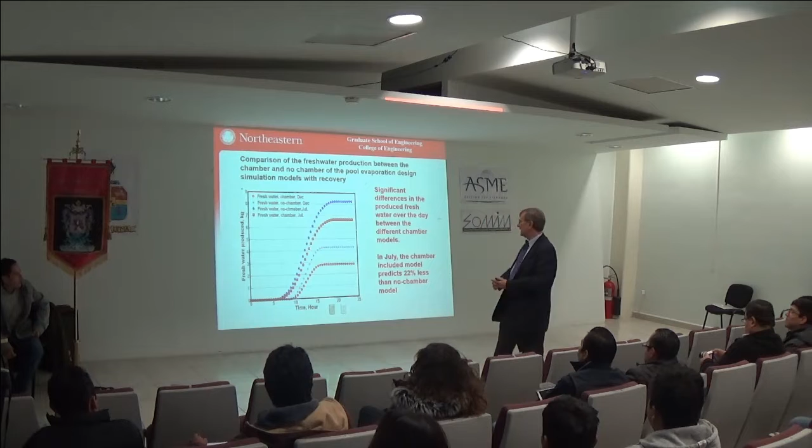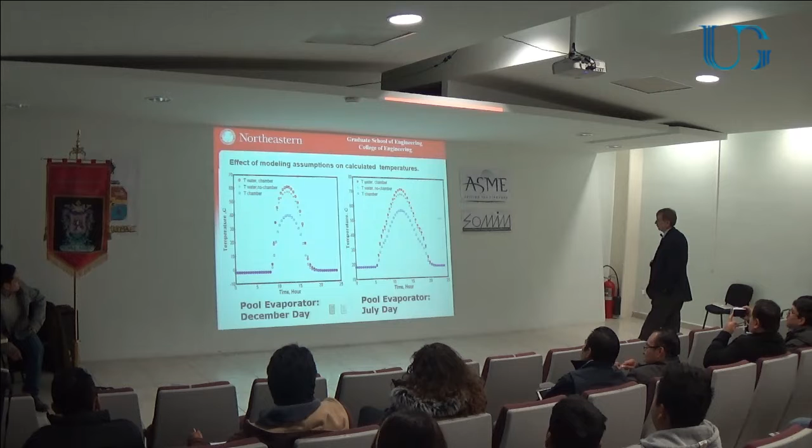Eric was really good in the other classroom. Can we go back a little bit? I want to set the stage a little bit more. I want to go back to the figure. Okay, right here.

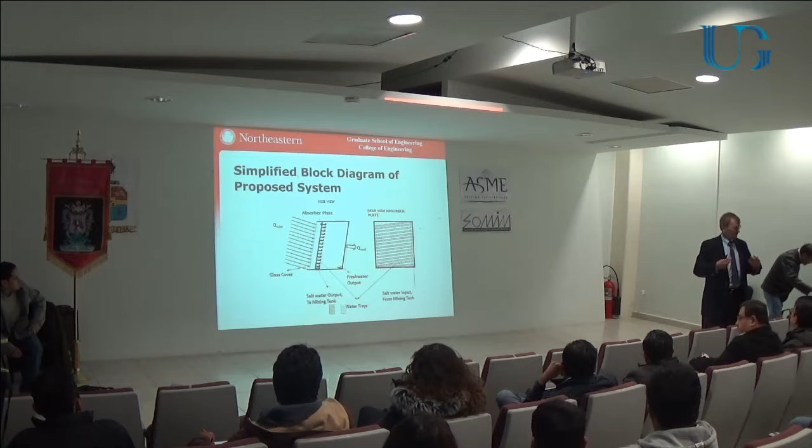What I talked about yesterday was predicting the incident solar radiation, and we talked about the Excel sheet. I talked about energy systems and what it takes to integrate them with economics. We need to worry about technical issues, and we need to worry about policy and getting people to accept them. I also talked about the need for an accurate model.

And the previous speaker, Eduardo, that was near and dear to my heart. Yesterday when I said thermal radiation and heat transfer, the radiative transport equation and radiation in participating media was exactly what I was talking about. So it was a very, very interesting, good talk.

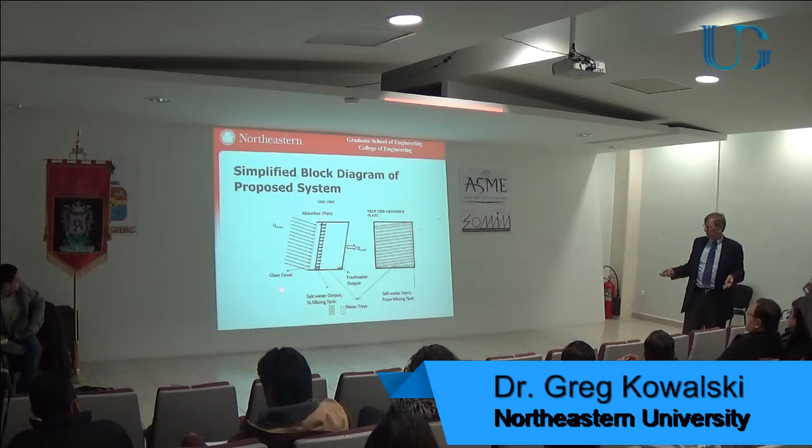But you need accurate models, we need accurate simulation. One of the things that occurred in the literature was in this chamber where we have moist air, we're adding more and more moisture to the air, water, and we want to condense it. Modeling this particular chamber requires both mass balances and psychrometrics, and the question is, do we have to go through all of that? Can we simplify things?

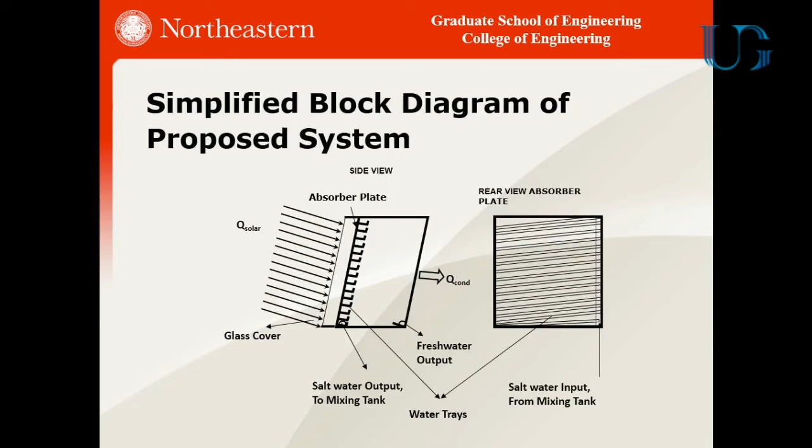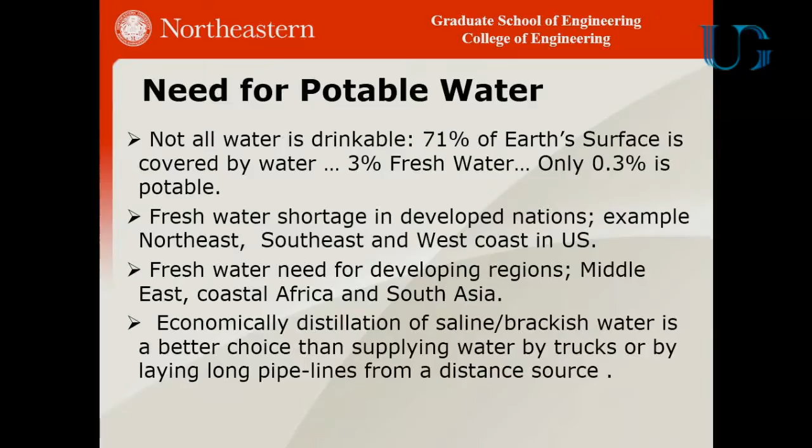Can we go back now? So we went through the models, the radiation, the temperatures, and this was a comparison that I was rushing yesterday. This is comparing the model with the detailed chamber model, where it says no chamber, that's the 2 degrees C assumed temperature difference model.

What you can see is, if I look at the July data, I'm getting a significant difference in the daily freshwater production between modeling it with all the physics and making a simplifying assumption. It's this type of assumption that can get us into a lot of trouble when we start doing simulations, because we're trying to develop a product that is going to be different or competing with reverse osmosis. If I made the no chamber model, my model predicts 22% higher output. And guess what? That might say, hey, this was better than reverse osmosis, when in fact it isn't. So you need to be aware of the accuracy of the models.

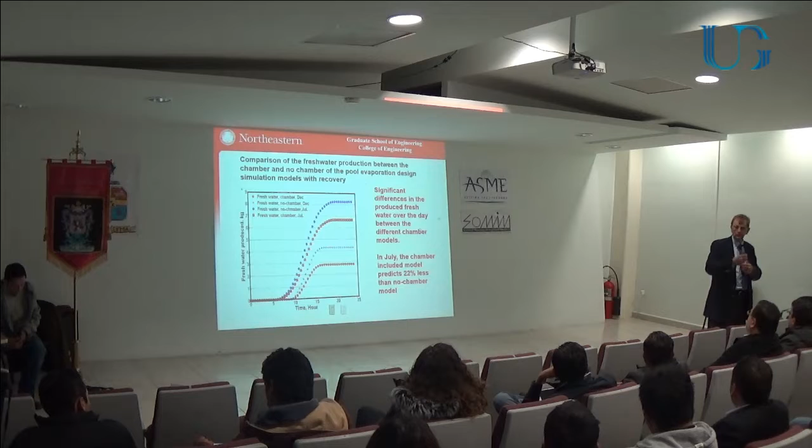I feel so disrespectful, I keep referring to the previous speaker by his first name, Eduardo. Professor Ramos. He deserves the respect.

When he was looking at his simplified models and looking at trends, he gave a very good explanation of the value. It gives you some basis to move forward. When we come to energy systems and comparing alternatives, you have to be aware of those assumptions and what role they play. Are they negligible? In this case, we need to include the model.

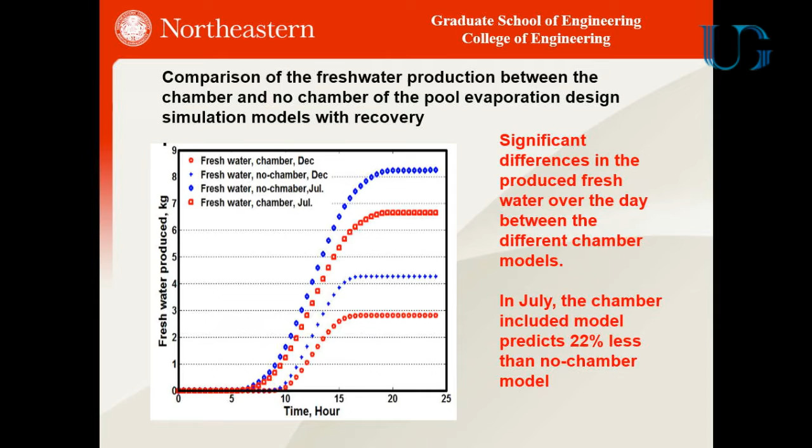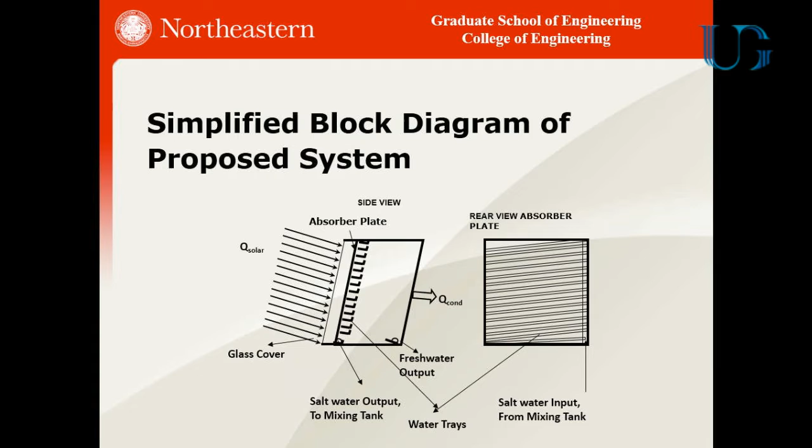May we go on? So I forgot this was here. So we're looking at this simplified tray model. Let's go to the next slide. What we did was include the chamber model, bring in the Boston solar radiation data, and we looked at comparing the pool evaporator, that very simple design, with the tray design.

Is the tray design better? That's the question. If you look at these results, the tray design are in the blue, the pool evaporator, that very simple design, is in the red. You can see that there's a significant difference, especially in the summer months, between the two designs. In fact, we're almost a factor of 2 better with the tray design in the summer. So this was very encouraging.

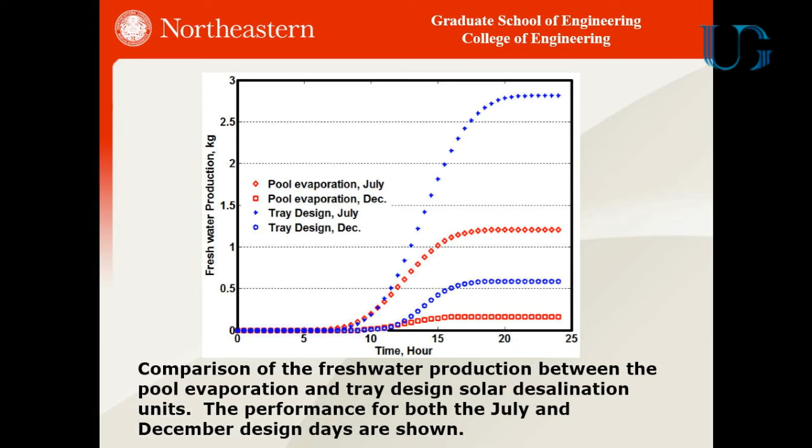Now, we also have to realize, comparing the two designs, I now have a very complicated manufacturing process to make those trays and attach them to the absorber plate. But I see a significant improvement. But how good is good? Can I have the next slide?

Okay, and how does this compare to the reverse osmosis? You asked me at the end of the presentation yesterday, was it you or you, what are we comparing this mini project to? Well, I'm going to answer that question now.

On this table, I'm comparing the reverse osmosis output to the tray in July and December. If I look at the reverse osmosis, I gave you this number, it produces 66 cubic meters per hour. But we want to know how much it's going to produce per day. Again, the reverse osmosis, single design point, we just multiply by 24 hours, run it constantly, and these systems are designed to run continuously, except for scheduled maintenance. It is going to produce 1,584 cubic meters per day.

Now, the solar collector trays that I'm describing are only 1 square meter. The idea is I build modules, individuals, and then put them all in parallel, put them on my floating barge. So the trays, putting in terms of the same volumetric flow, are only putting out 2.9 thousandths of a meter cubed per day.

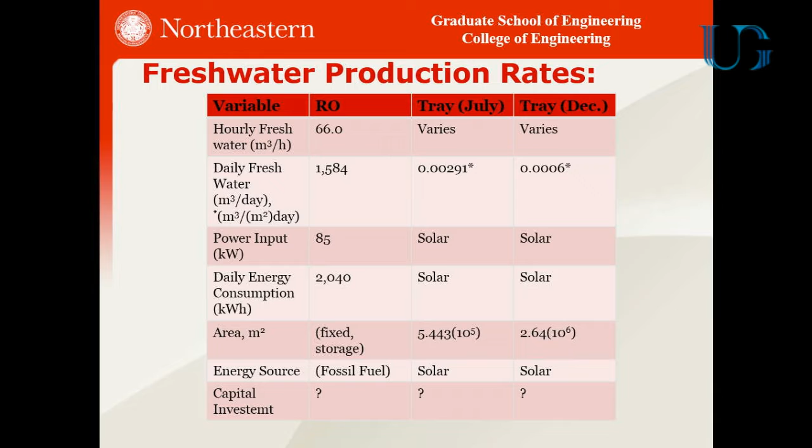The modification to the mini project, the addition: what I want you to think of is you install your solar collector fields, you collect energy and have a perfect storage medium, and we'll use that energy to supply this power for the next day. Again, this is why renewables, variable sources, could really complicate our lives. Because in this case, it isn't a matter of plugging into the plug. I have to collect energy that varies over time.

Now, in the solar case, I have no other power input. The area I'm assuming, for pumps, stored water, is basically going to be the same, and I didn't put that down. For the reverse osmosis, let's assume fossil fuel. And I don't have a capital investment, I don't have the economics for this, but let me just finish the chart.

The area that I would require in July for my solar trays, I just remember the ballpark number, I don't want to give it exact. It is 5.4 times 10 to the fifth square meters. Anyone have an idea how big that is? No? I don't either, but I'm getting kind of lost in 10 to the fifth.

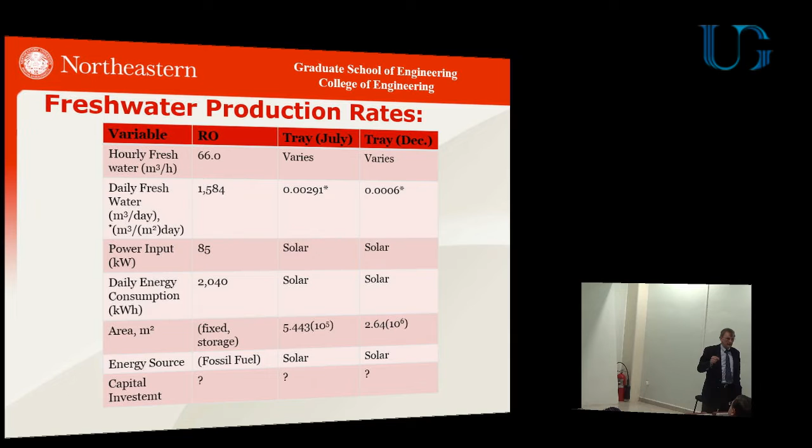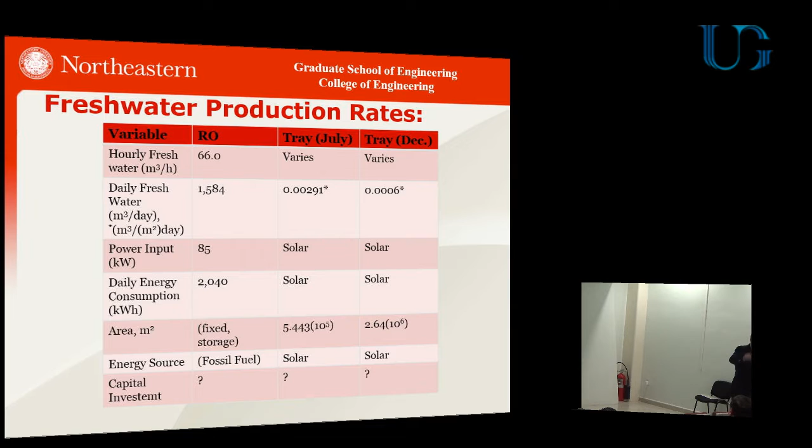No, this is for the collectors and land, installed. That's quite an investment. And even if it lasted 20 years, how large is Salamanca? How many people live here? What's the population? Is it 150,000 residents who now would have this amount of fresh water, probably not enough. But start to divide 150 billion by 20 by 150,000, and your water costs are fairly significant.

Not sure what the reverse osmosis plant will cost. But this is one of the things that you need to think about with renewables, and I fully support renewables. I don't want to give you the idea that I'm trying to discourage renewables, but as engineers that want to solve problems, we have to come up with solutions that people will implement.

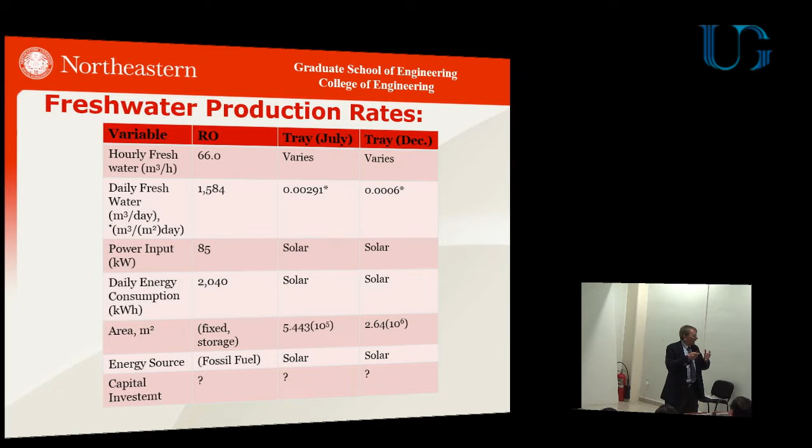So great, we have all this electricity, nothing to use it with. So the electric utility companies actually became appliance dealers. They would sell electric hot water heaters, irons, electric stoves, the cooking utensil of the future. I don't think they quite got to refrigerators. But what happened is, in order to sell electricity, they literally gave away electric hot water heaters.

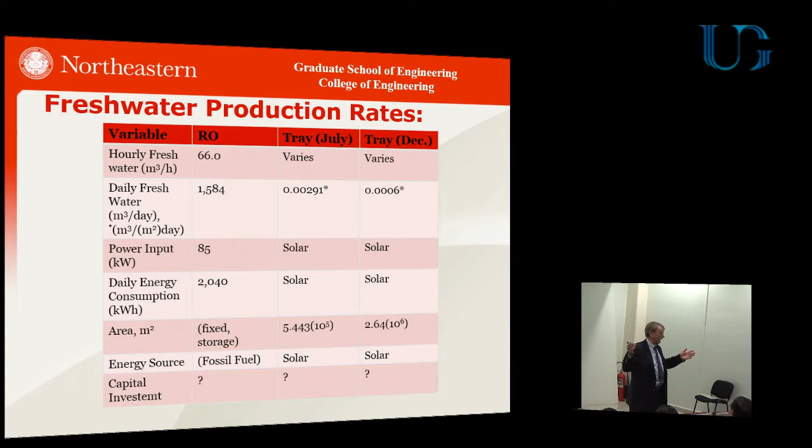So they electrified your house, gave you a hot water heater, and suddenly you had a rusting tank in your attic that just became an eyesore. And the use of solar for hot water heating totally went out of acceptance. Now it was a hot water heater. Today it's a natural gas fired hot water heater. Things change. That customer psychology, people's perceptions.

So it's not just about money. You have that societal impact.

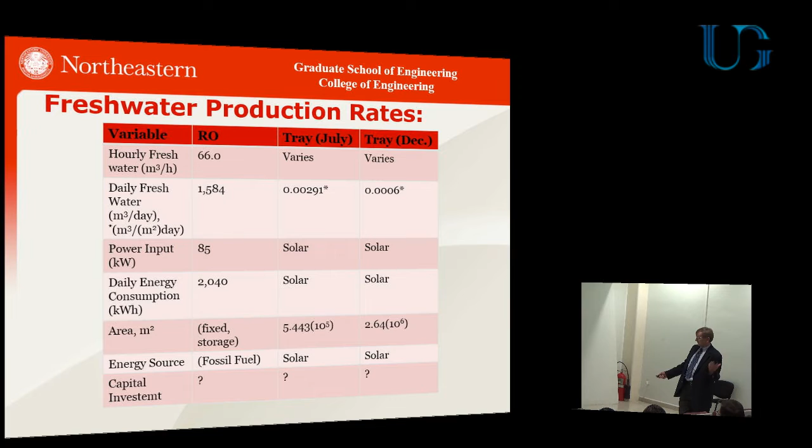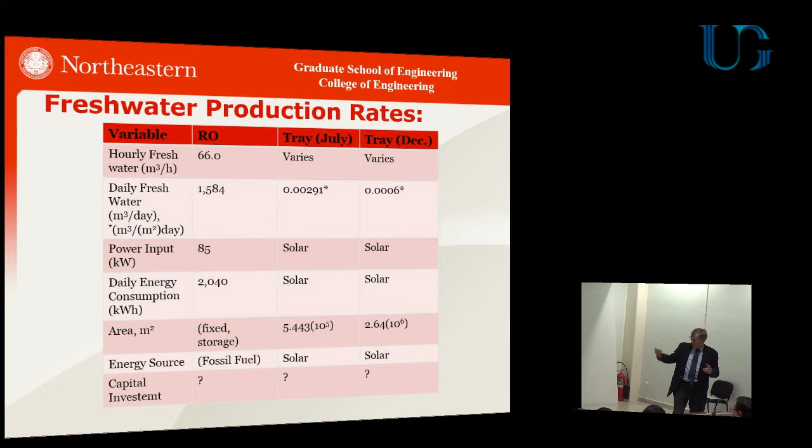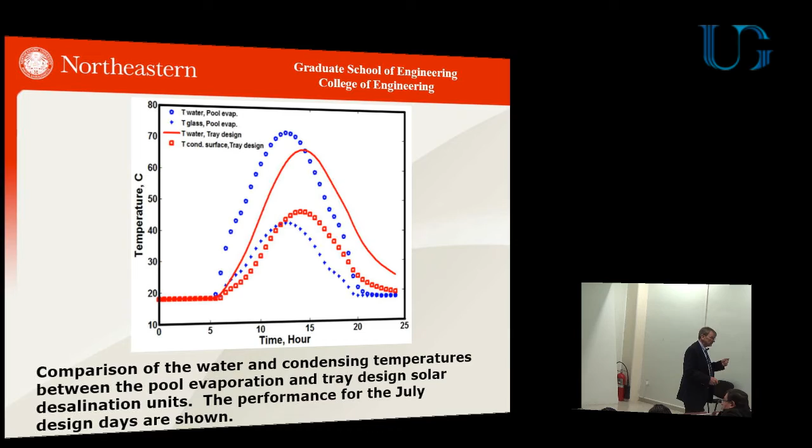And when I look at these results and I'm trying to spin them in some way that I don't feel embarrassed up here, a multi-billion-dollar project that's going to take up 240 soccer fields, is this the best that we can do? May I have the next slide? Oh, I'm sorry, leave it there. Is this the best that we can do? Because if it isn't, how good can we make this? And can it become competitive?

Now, one of the other results, just to show you that you can mine these simulations, this was comparing the water in the pool and the glass. These are the two major temperatures. One affects condensation, one affects the evaporation rate. And you can see how, with the tray design, there's a built-in

storage effect that we weren't anticipating. Yes, we produce lower temperatures in the water, but we produce more fresh water. And if you notice, the red lines continue producing fresh water a little bit longer than the blue lines. The reason for that is we have a more massive absorber plate that displaces the peak temperature slightly. This indicates that maybe we should be looking at some of the mass of these units, and maybe we can take advantage of this.

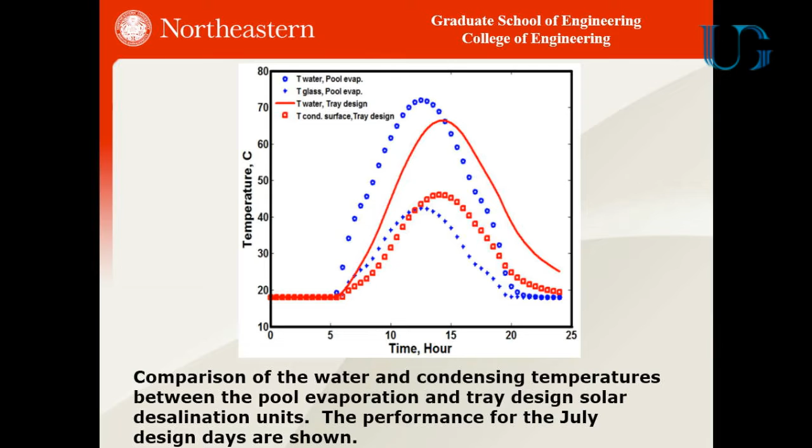And again, the idea is, can we do better? And this is where the second law comes in. This sets our operating limits. And you've heard some of this before. It identifies where the losses and irreversibilities are happening, a roadmap to making us better.

Is the source matched to the load? And I mentioned yesterday, all of these are tied to sustainability. The two parameters that we want to look at are exergy destruction or entropy production. We also want to look at a second law efficiency. That's what both Professor Lienhard was quoting and what I have been quoting in my presentations, our second law efficiencies.

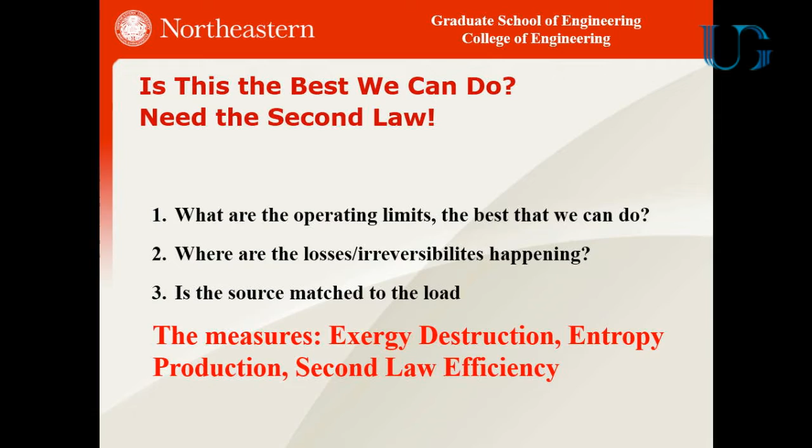The second law is... how many of you have had thermodynamics and the second law? Okay, I am going to pick on one of you. Are you very comfortable with the second law? Are you as comfortable with it as you are with the first law? If I asked you to calculate the exergy destruction that I'm producing as I lecture to you, would you be able to do that?

Okay, you're better than my students. Usually we don't have the intuitive feel of the second law. And we're told all these one-line statements. The most popular one is: the second law, you always lose, and you never break even. Right? And the little sidebar, you have to play the game. You can't opt out. Well, that's true, there's nothing wrong with that statement.

And then we get a little more formal: you cannot operate a power-producing device with a single heat reservoir. You need a heat rejection, and I'll come back to that. But the second law has a lot of subtleties that don't exist in the first law, and we almost always revert to the first law for design. So I thought I'd take a little sidetrack and see how many people have not had thermodynamics.

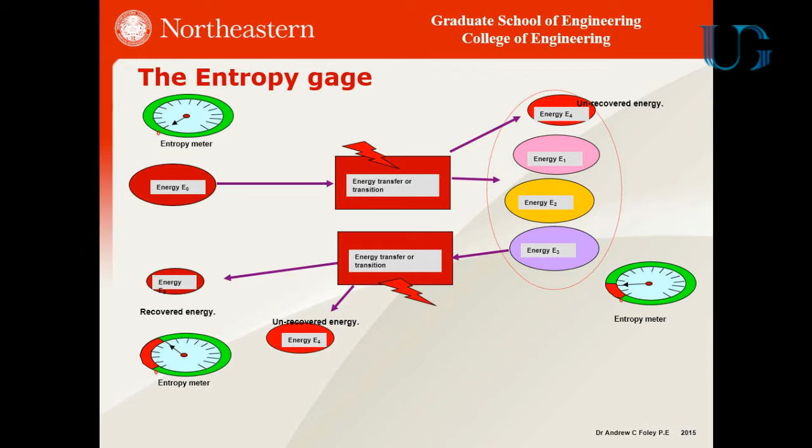And by the way, I forgot on that slide, Dr. Andrew Foley is a professor at the U.S. Coast Guard Academy, and he probably does this much better than I.

But what I want you to think about is a fluid flow that goes through a system and encounters a restriction that we call an orifice plate. And this restriction alters the flow, causes a pressure drop, and the energy in the flow takes on a different form as it moves through.

Now, when I talk about energy, I'm talking about internal energy, flow energy, potential energy, and kinetic energy.

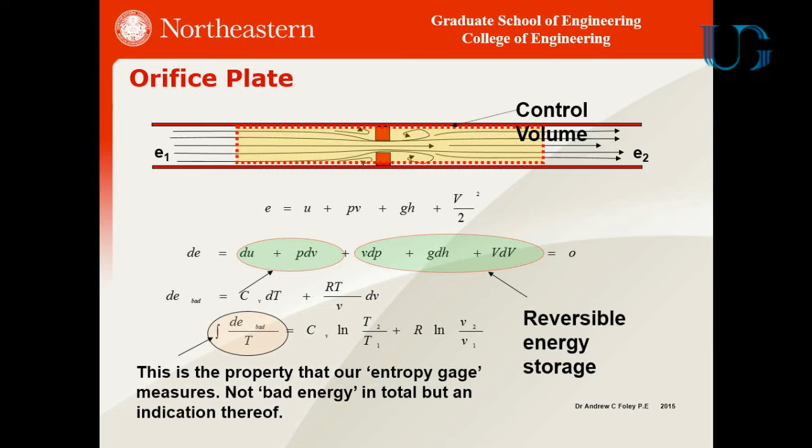And when you think about these energy changes, potential energy is reversible. If I have something at a high potential energy, lower it, I can extract energy from it. If I move it back, it takes the same energy to bring it back up.

The same with kinetic energy. These are reversible. I can store them. I can have a rotating flywheel that stores kinetic energy. I can pump water up a mountain into a reservoir to save potential energy.

This term VdP, think of it as a pressure spring. You have an incompressible material, specific volume isn't going to compress. When you decrease a volume, you increase the pressure. If you release it, you're going to recover that energy. It's the pressure times the change in specific volume or density.

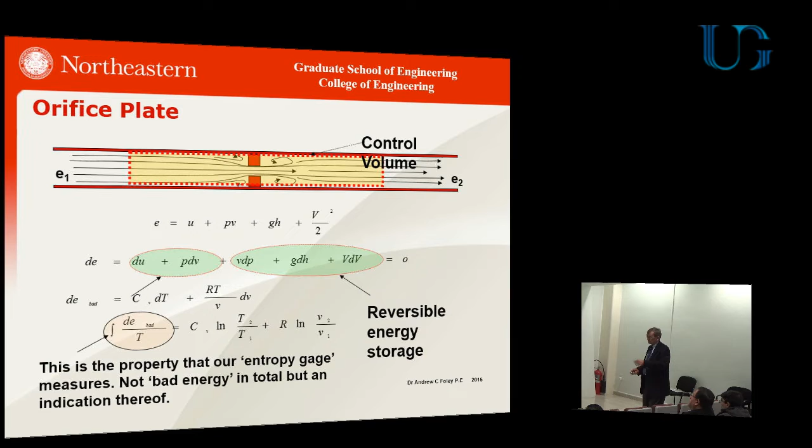May I have the next slide? Also, by Dr. Foley.

If I start taking in entropy accounting, when I have the first law, I have my system of interest—this room, all of us. The energy in this room is changing as a function of time. I hope I'm not increasing the decrease in energy, okay.

But it does that by interchanging with the surroundings. And when you do an energy balance, the rate of change of energy in the system must exactly equal the rate of change of the energy in the surroundings. Energy is conserved. We know that.

But let's go to entropy. If I look at the entropy change in my system with respect to time, and keep in mind that some of this entropy stops being recoverable.

My system has to interact with the surroundings. That is an important statement. The system must interact with the surroundings. That means there's a rate of change of entropy in the surroundings.

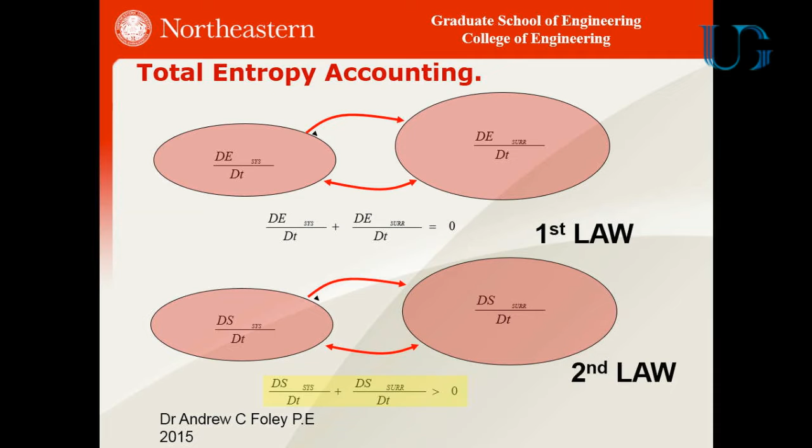Can I have the next slide? Everyone take a really deep breath. If you have any caffeine products, please take them.

Here's my gauge. Entropy is an important key measure. But what we also have to do, or what is a valuable tool, is something we call exergy. It's related to entropy. Exergy is the maximum possible rate of useful energy that we can get from any state or any material at a given state. So if I bring in a very large tank of hot water, it has a certain amount of useful energy that I could extract from it.

How much useful work could I get from that hot water? Or that heat source? Or the sun? That's what exergy provides. Let's again look at E as representing the enthalpy, includes the flow work, potential, and kinetic energy. If I take any device, what I'm going to do is look at the entering energy, my hot water. In this device, I'm going to convert it to work out - a flow of energy out and a heat flow out.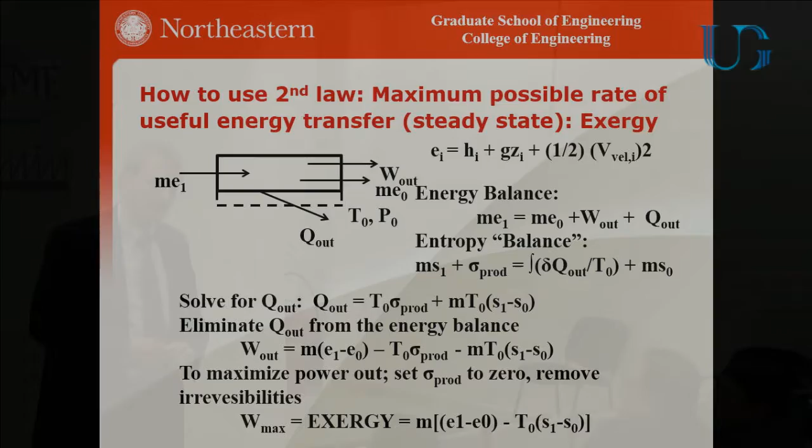If I come and tell you that in the class you're going to go to this afternoon, you're going to have an exam, don't look like 'what do you know that I don't' - I'm making it up. What if I tell you that the grade on your exam will be less than 100? Have I given you any useful information? No - everybody gets less than 100. If I tell you, I don't know you, so I have no idea. If I tell you that your grade will equal 85, have I given you useful information? Yes. Your grade is 25 - the average was 20, by the way.

When I state equalities, I have something useful. Inequalities, it doesn't work. So what we do is introduce entropy production - it's what makes this an equality. Entropy flows with the heat flow divided by T. Who's the gentleman that said he felt comfortable with the second law? I don't think we necessarily gave you this integral without saying it was at a constant temperature. But in most processes, this temperature varies - that introduces another complexity. And then we have the entropy flow out.

In a perfect world, entropy production would be zero. I would produce no additional entropy. That's the ideal limit. I hit one of my major bullets. We have a limit.

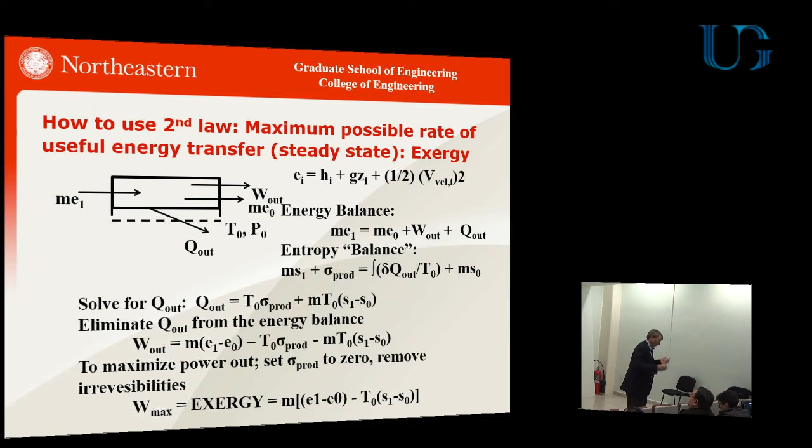We also have some tools for looking at different exergy flows. This large box here is my solar collector. I have exergy that flows in with the water.

Oh, wait a minute. The wait a minute was planned, okay? This wasn't just, oh my God, what am I going to say? I want your attention.

When I did the first law analysis, I just said let's treat seawater as a single material. It had a certain value of the latent heat, and it produces an accurate model. But when I come to the second law, an exergy analysis, I have to take into account how much useful energy I have to expend to separate salt from water.

That means I can't avoid treating it at the exergy level. For the second law, I need to treat seawater as a mixture of water and salt. And depending on the type of salt, as you saw in yesterday's lecture by Professor Lienhard, this is going to bring in all types of chemical potentials and Gibbs functions that I need to include in these calculations.

Now, just hit enter. The red line is incorrect, but it's a point I want to drive home. Many people would draw the exergy system with this red line, and they would take the exergy that flowed out with the brine and the fresh water and just say, well, I'm including it correctly in the system. The problem is, if you don't use this exergy for anything, it should be an exergy destroyed term. I'll say more about that on the next slide.

How you set up your system becomes important. So if I look at my overall system, including a transient term, in order to balance the exergy flow equation, I introduce a term: exergy destruction. It's related to entropy production, but it equals the difference in the exergy in minus the exergy out. I write this for the entire system. I then need to look at the exergy flow with the heat loss, which is simply related to the Carnot cycles.

But something I said before—how much time do I have? Half an hour? Okay, I can be slow. I said 2, okay, I'll do 2. 10? Okay, going down rapidly.

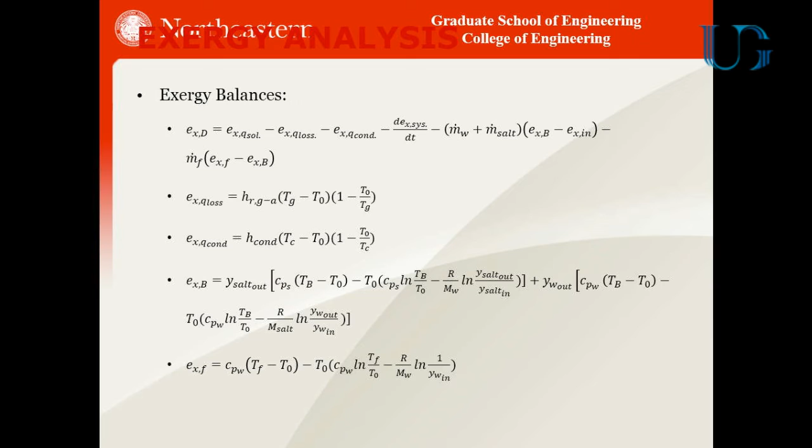The second law efficiency. Can you go back two slides? One more. Okay, the red line is the product system. This is incorrect because we're neglecting exergy that's flowing out of the system and what happens in the surrounding. The complete system is the gray.

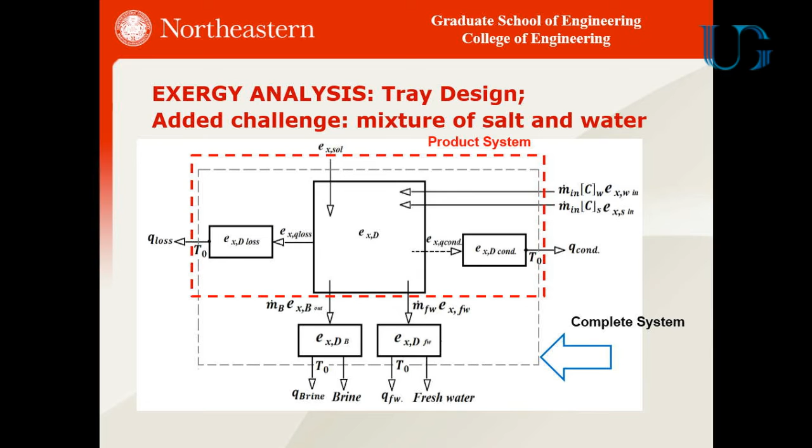Please go back to the table. The second law efficiency on the product approach is 6.65%. This is better than the reverse osmosis. It's incorrect, but it's better.

The pool design performs much lower, but it's still in the reverse osmosis range. Well, we wanted to be correct. When we looked at the actual second law efficiency for the complete system, the second law efficiency drops down to

0.63%, under 1%. That's not very good. Similar drop for the pool. The tray definitely is better performing than the pool, but we already know that, and one of the reasons is because it has a larger evaporator area per incident area.

But this difference between the product and the complete system is telling us one important thing. I have a few minutes, so I can play the audience. What is this telling us?

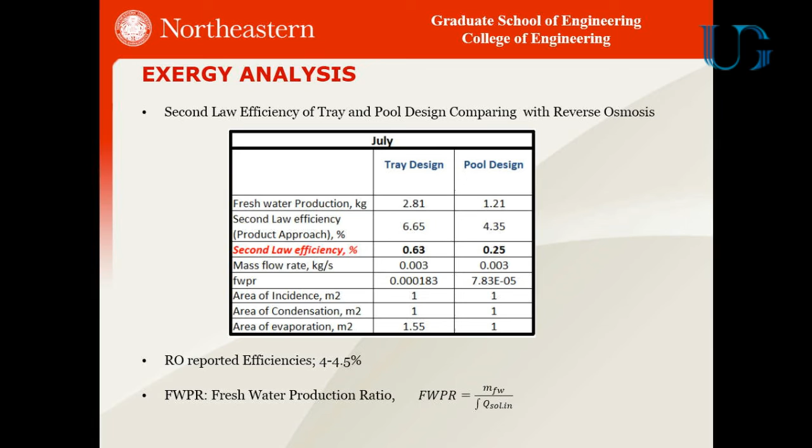Remember, the second law efficiency is I add up all the exergy destroyed in my tray collector, the exergy that is leaving, that I don't use, and the exergy destroyed in the heat transfer. Why this big difference between that product approach in the second law efficiency and the complete approach?

Can you go back to the system sketch? That's exactly correct. When I look at each of these exergy destruction terms, this exergy destroyed in the brine flow,

this hot flow out, is one of the largest exergy destruction terms in the system. And that's why we see that difference. This is telling me how I should improve it.

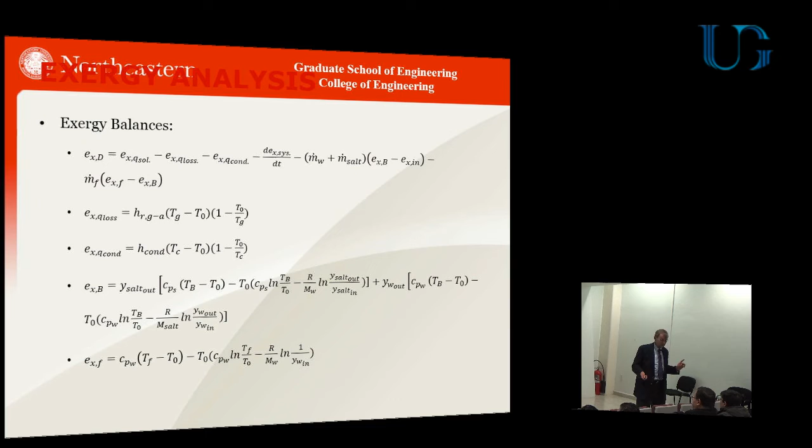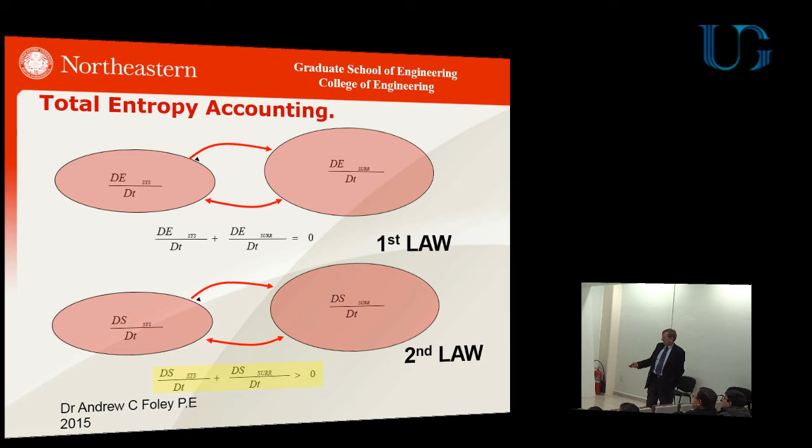We had to skip one, go back one, move forward, I'm missing a slide, go down. These two are out of order. I apologize. What we did was to put a heat exchanger, very simple heat exchanger, that only operated off the brine because that was the major flow. We took the hot brine, put it through the heat exchanger, and then discharged it.

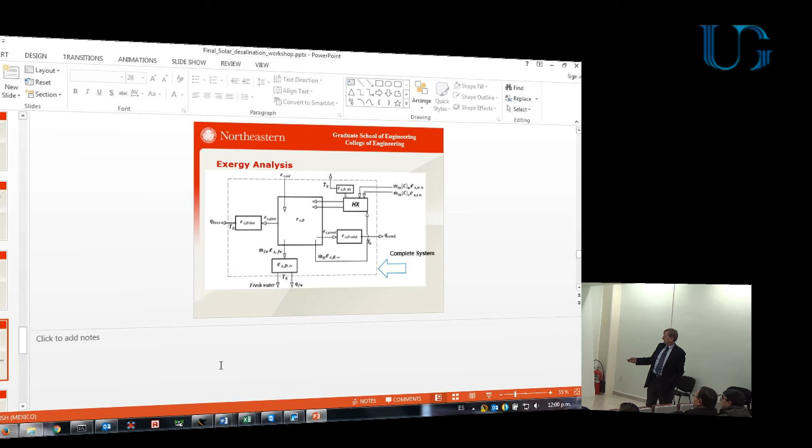Going out here, we preheated the incoming seawater, and we've only looked at the complete system. What the earlier analysis did was to say, I was throwing away a lot of exergy here.

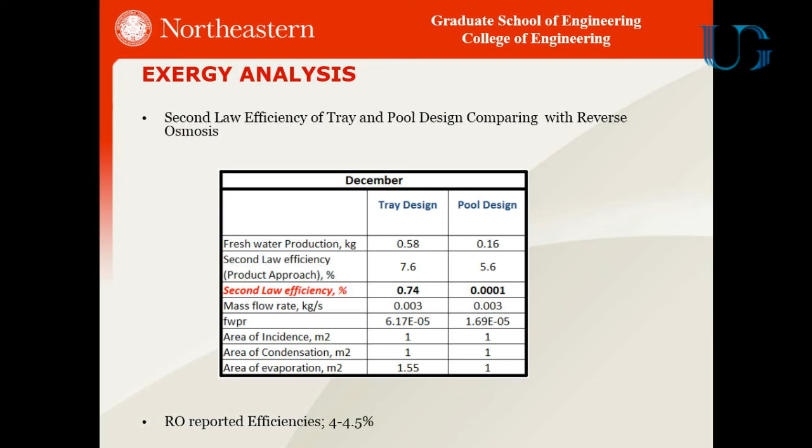So move up one slide. If I take the recovery system, and I again look - I'm sorry, this is December. Move forward, move forward.

Okay, when I look at what happens with the energy recovery, and I'm only looking at the tray, that's my better system. What I see in blue is the system without the heat exchanger, non-recovery. The recovery system has the heat exchanger. We get almost twice as much water production in both December and July. That's the main purpose of this.

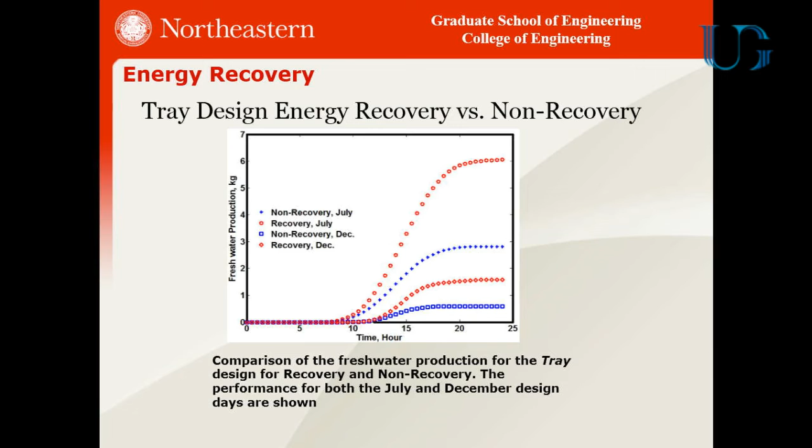Go one more slide. This just shows the salt temperature rise between no exchanger, we're up around 63 degrees max. With the heat exchanger, it happens earlier, and it's close to 30 degrees. By the way, the external temperature here is 19.

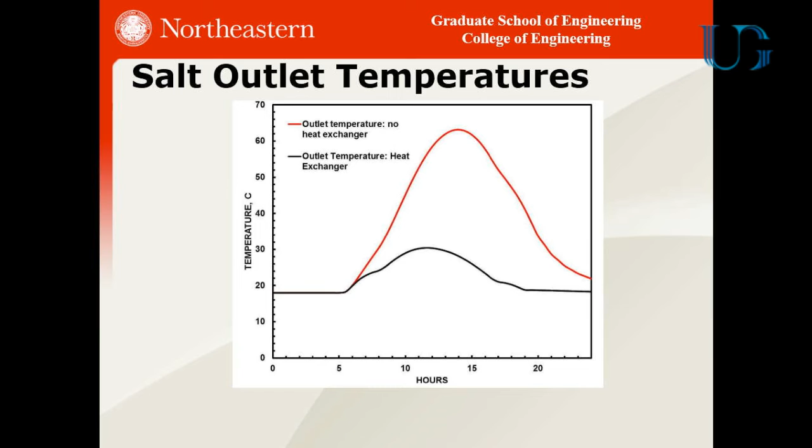Move one. The salt concentration. You notice that as I remove water, I'm increasing my salt concentration. I'll come back to that at the end.

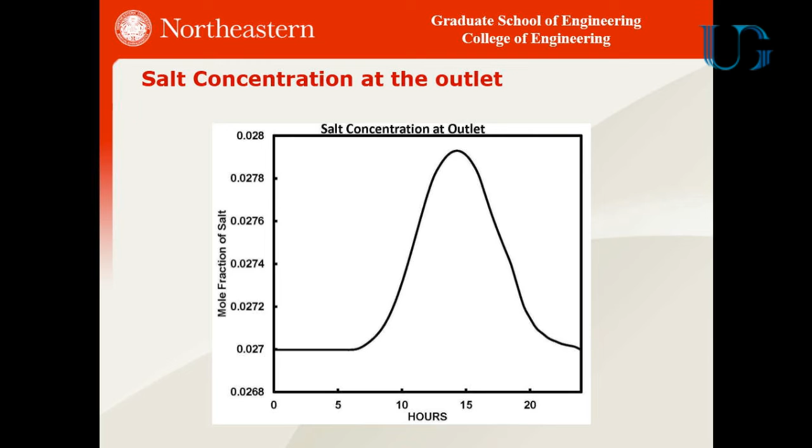Please, no, forward, one more. Tray design. I'm producing 6 kilograms per day instead of 2.8. My second law efficiency went from 0.63 to 2.79.

Not quite reverse osmosis, but keep in mind, I'm including the primary energy source. The other figure didn't. To make my simulation work, yesterday I said

that we operated the collector to exit with temperatures below 100 degrees C, no boiling, and that actually had water leaving. To run the system with the recovery, we had to increase the mass flow by almost over a factor of 2.

What the second law allowed me to do, and what I want you to be taking away from this, is it guided me into a means to improve the performance. Yes, I've increased my cost. Can we have one more slide?

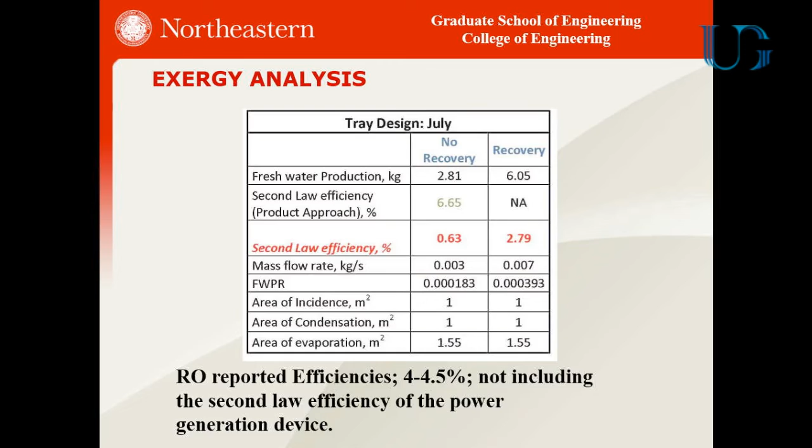But I've decreased my area. Now in July, I think I need 25 soccer fields. But I also reduced the cost factor. And I still am apparently not at the same second law efficiency as the reverse osmosis. But this is not a valid comparison, apples and oranges.

My analysis of the solar still includes the primary energy source, which isn't included in the reverse osmosis analysis. If you consider that most power plants only work at 30% efficiency, you can see that this number is going to go down. I might add that in next.

Did we set a date for when you're going to hand in the mini project? Nobody's going to ask me that question. You're going to just, six months from now. Oh, if you could have that done by next Tuesday and submit it, that would be great.

What you're going to be doing is adding a power source, a photovoltaic. I will now have a number for the next presentation of both this reverse osmosis plant as well as the primary source. Can I go to the slides? I want to get through this and then open up for questions.

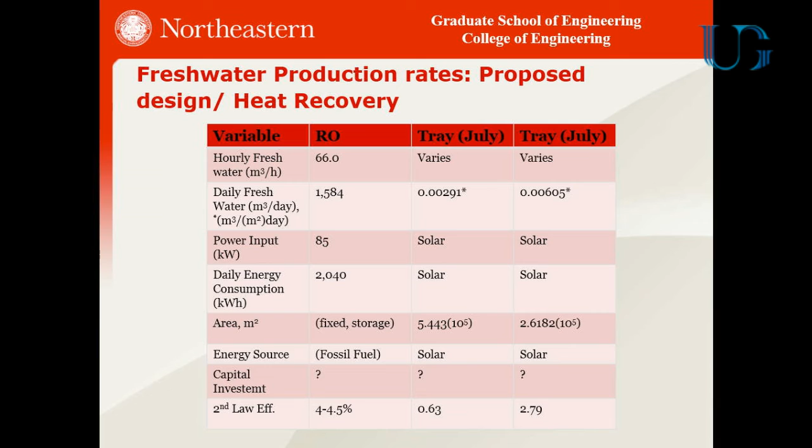I've rambled for two days. What do I want you to leave with? I don't want you to leave with being an expert on solar desalination or calculating incident solar radiation, but what I want you to do is to recognize the need to completely define your system and processes.

The second law will help you. I want you to recognize that when we have fossil fuels or biomass, we can define a single operating point - our comfort zone is here. When we bring in renewables like solar or wind, that are variable with respect to time, it requires a different approach. You need to do simulations.

The simulations are going to end up being in MATLAB, Excel. How many of you do C++? Okay, probably an overkill for some of this, but a very powerful tool. You need to be looking at what happens over the day.

The gentleman that asked me the question after class about averaging cloudy days - I gave you one day. If you were doing this for a product, you'd be looking at a minimum of a year's worth of data, and it would be average weather data.

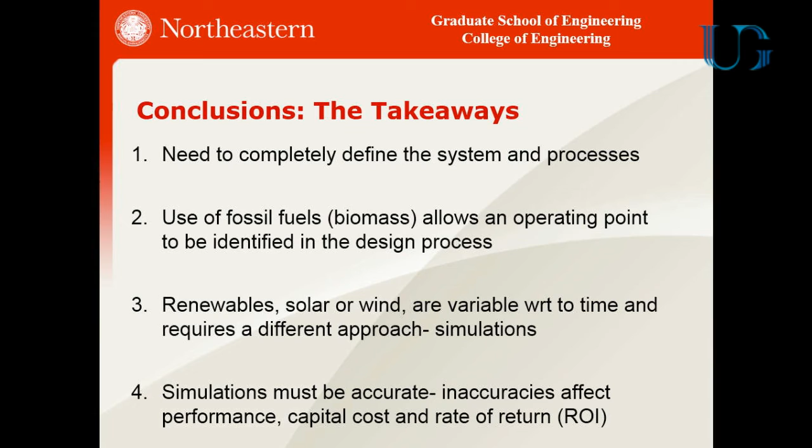The design - the second law gives us our limit, the best that we can do. Professor Lienhard had a fantastic example of an article that clearly exceeded that limit. This is all important when you start a project.

The RO example I'm quoting was actually done to identify the losses, much as what I did with the solar example. And finally, there are many complicated pieces.

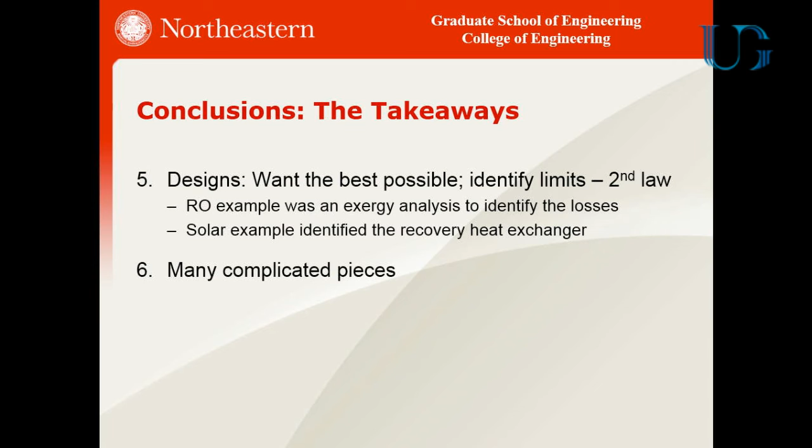Last slide. There's a lot missing - I didn't talk about energy storage. Energy storage is the next big thing. I have a research associate funded by a company with the sole purpose of coming up with energy storage products, mainly aimed at batteries, but energy storage is all important.

Economics - I did not really do an economic analysis, and one needs it to really make this work. Society: 240 soccer fields versus probably two soccer fields for the reverse osmosis plant - probably one. Are you willing to trade land for removing a fossil fuel source and CO2 producer?

Earlier we talked about whether you're willing to give up agricultural land to produce water. Okay, these are all things that we can help answer, but society has to weigh in.

And regulations and government subsidies - did Enrico in any of his talks mention that most of the profits of the distributed heating projects in Italy come from the government subsidy? Okay, I just said it. In Italy, they heavily subsidize a lot of alternative energy systems.

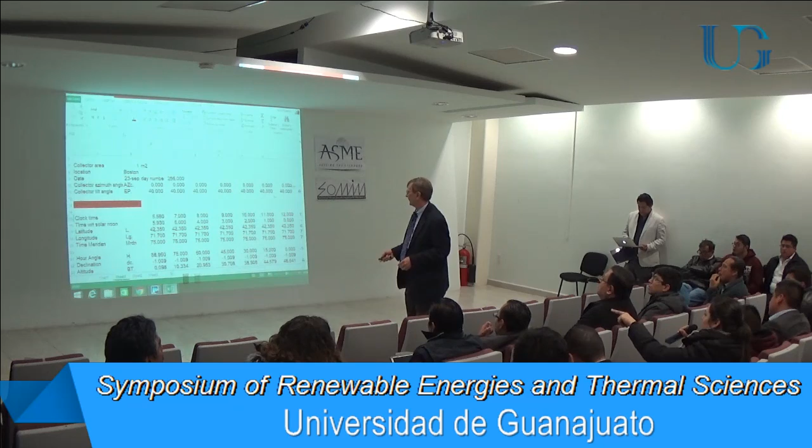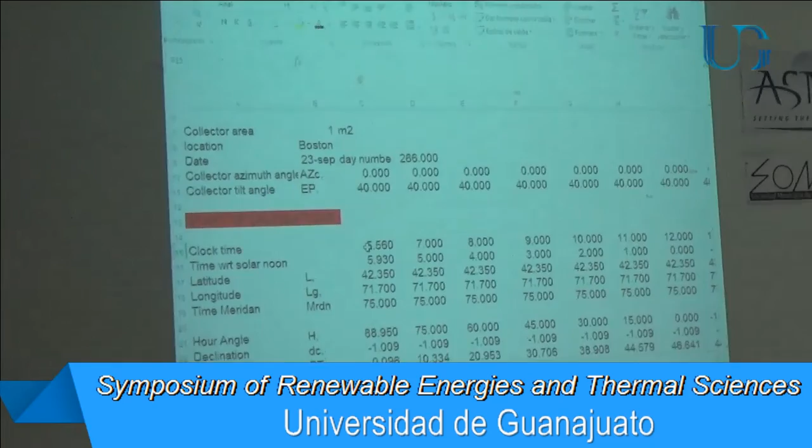Okay, did that answer your question? Yeah, kind of. I just wanted to know where the clock time affected energy in the calculation. Yeah, it affects the hour angle. Can you go down? Keep going, keep going. Okay, on row 40, would you highlight, would you change the font color on 40?

To black? Okay, this is total incident. If you multiply this by 1 hour and sum them, you'll get the total energy. If these are not linear between points, you'll get a different answer with shorter intervals. Feel free to add columns, cut and drag. Yeah, because we tried to change the time interval, but it didn't change the bottom, so that's why we asked.

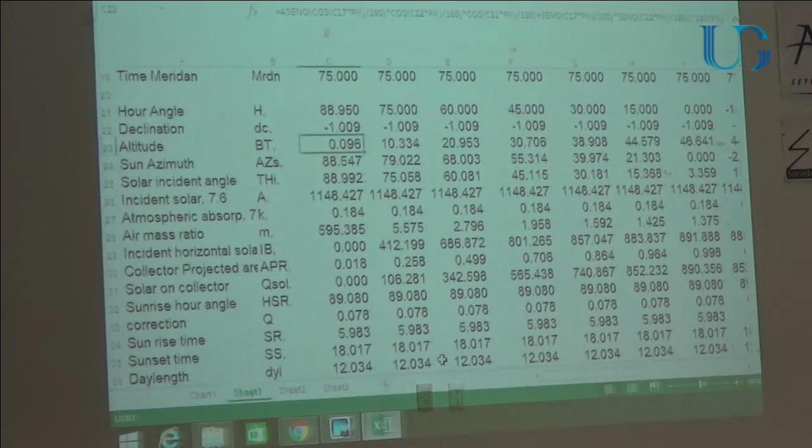Can I ask you something? This one is still on Boston, right? The other class went to Salamanca. If you go up in altitude, if you change this to Salamanca in July, this number was probably fairly high, which means you're not quite at sunrise. You need to work your way back to sunrise. Okay, thank you for your question.

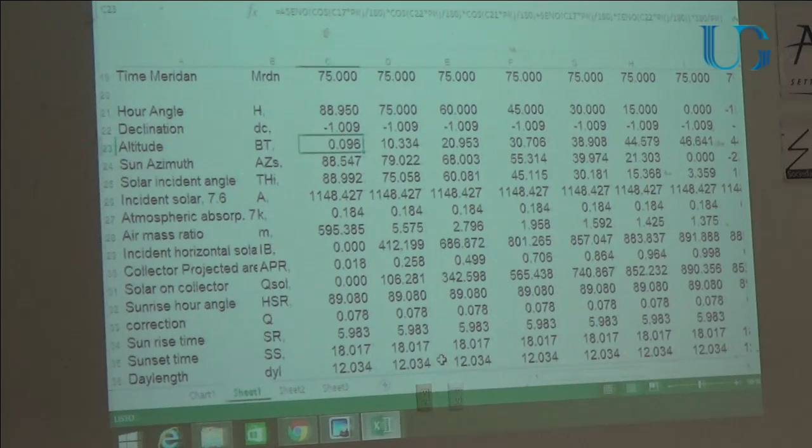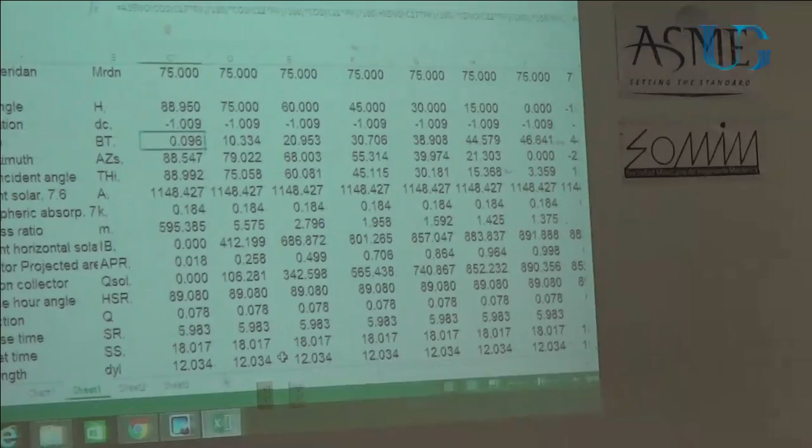Can I make one other comment? If you email me with a question, very often, if it's about the Excel sheet, send me your Excel sheet, because it's much easier. If it has to do with calculations and you've written them out, scan them, take a picture with your camera, send it to me. I can download it, make my comments, and answer your questions. It's much easier than trying to write pages of questions. Thank you.